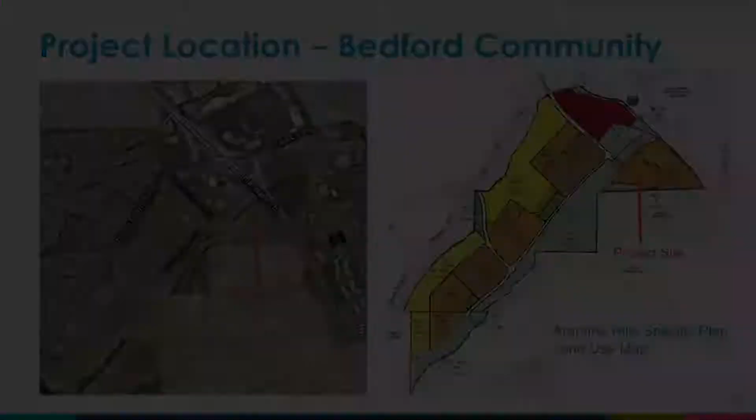The applicant of the request tonight is Pacific Ventures. They are the successor to the New Home Company, which was the original master builder of the community. Pacific Ventures is now the master builder, responsible for constructing all the backbone infrastructure as well as obtaining all the land use entitlements for each residential phase within the community. Pacific Ventures is now ready to develop the next phase within the community, and that is the proposal being presented to you tonight.

This project requires the approval of 2 land use entitlements: a tentative tract map and a precise plan. The tentative tract map is a request to subdivide the project site into 13 lots, intended to accommodate the 118 homes. The map also proposes to create 19 lots, which will contain all the private streets proposed within the development, including the open space and the private parks.

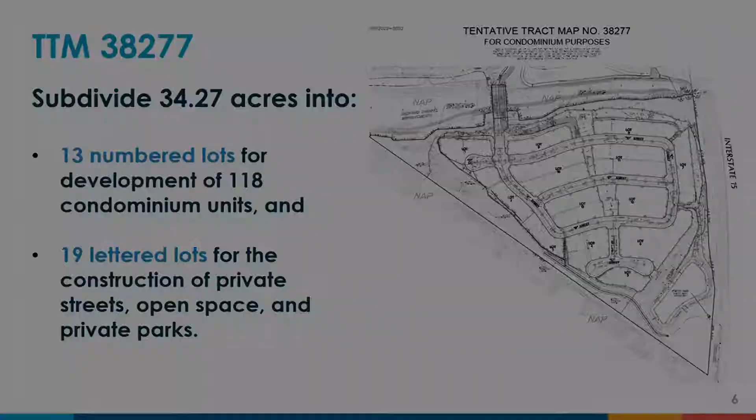The precise plan includes several details, including the site plan of the development, the product type details, the landscaping, and the fence and wall details of the proposal. In the next several slides, I will be briefly going through each element of this proposal.

The site plan is designed to accommodate the 118 detached homes, which will all be separated by fencing. The streets within the development are all proposed as private streets, but will allow for on-street parking. Access to this development will be by a bridge over the Bedford Wash, which the developer is currently constructing. The entire development will be surrounded by open space, including slopes, trails, and amenities, and there will be 2 centrally located parks within the center of the development.

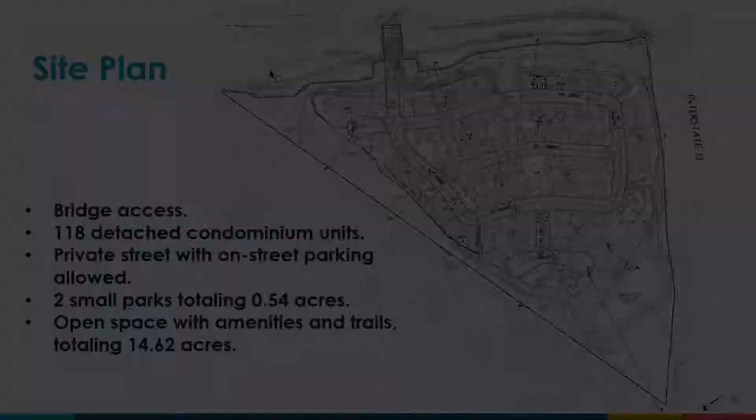There are 6 different floor plans being proposed, ranging from approximately 1,500 square feet to 2,700 square feet. Each unit has its own 2-car garage with a driveway and access to the private street. There is a mixture of 1- and 2-story homes, and 5 different architectural styles are being proposed. The floor plans and architectural design comply with the design guidelines imposed by the Arantine Hills Specific Plan.

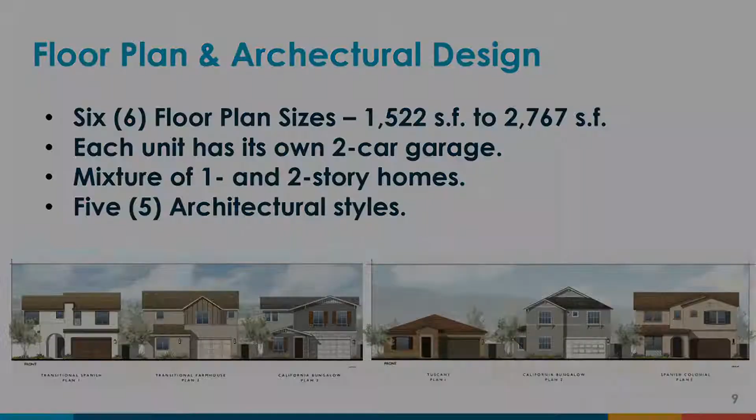The development will be fully landscaped per the landscape requirements of the specific plan. This includes all the front yards of the units, all the side yards outside of the perimeter walls, the slopes, the open space, and the parks.

Amenities include 2 centrally located parks, identified as the linear park on the plans in your staff report. There is also an additional park located along the north perimeter of the development, along the bluff of the wash, identified as the bluff. This area contains picnic tables, fire pits, trails, seated areas, and gardens. Private trails are proposed throughout the site, running along the bluff, along the wash, and along the freeway down to the south end of the site, and through the 2 linear parks.

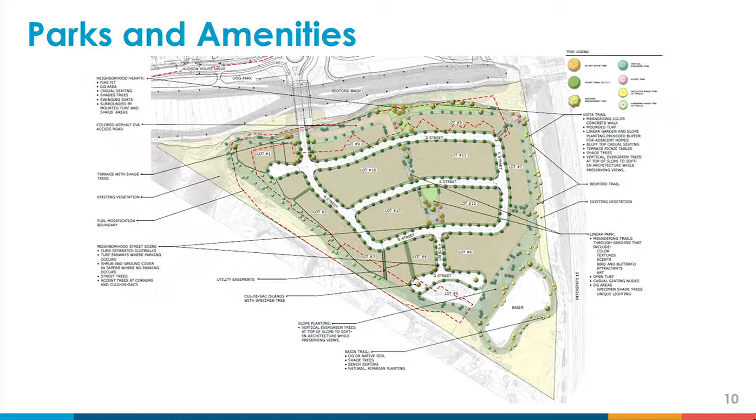The Planning and Development Department recommends that the Planning and Housing Commission approve the 2 applications tonight. That concludes my presentation. If there are any questions, I am available. The applicant is also available for questions as well. Thank you.

Thank you, Ms. Yang. Before we open public hearing, let's move to the commissioners with questions for staff, and we'll start with the tentative tract map item first, if we would. I'm sorry, Ms. Alexander, I don't have any comments for staff. Thank you. Okay, any other staff questions on the TTM?

Mr. Woody? Yeah, I have a question. So this item is labeled TTM application to divide into 13 lots for the development of 118 residential condominium units and lots for private streets, open space, and park. So the thing I'm not quite getting, though, if we're subdividing it for condominiums, but these don't really look like condominiums. Can you explain that?

Thank you, and they also put it up above. So if you could see between the three housing areas, you have lots left and right of the park in the middle, so lots C and D. Correct, C and D. So you have B up above at a certain width, you have C in the middle with a very narrow half of the width, and then you have D, which is wide again.

So it just stood out to me that C should be as wide as the other two. You have housing lots 95 and 79, I believe, and I understand why it's little, because you wanted to put two more housing condos in there. But it seems out of sorts that it should be just as wide as the other two park areas above and south of it. You have 118 condos, and it'd be great to maximize park space versus a parklet walkway.

Do you want me to respond? Okay, I absolutely hear what you're saying. I would respectfully maybe disagree a little bit that I think it adds some interest to the way the community is laid out, but I would also point out that the specific plan allows 147 homes on the site. We're proposing 118, so I think our parks are exceeding what was originally planned. We've got 0.54 acres, originally it was 0.3 acres.

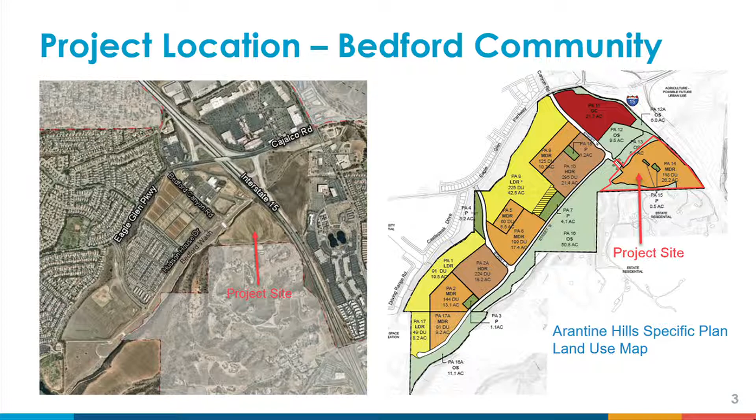Yeah, that's great, that'll work. So when you're talking about Phase 1 and Phase 2, which you said were sold recently, all the builders had sold all of Phase 1. So that's where our current main rec facility is, sort of in the central location of the community, and all of the homes are sold to home buyers, so it's fully occupied. Phase 2, towards the Bedford Marketplace, homes have been sold but not in all neighborhoods, and none have closed yet. We do have different guest builders building in 6 different neighborhoods in Phase 2.

So on the diagram, the map there, which parcels would be Phase 1? Can I direct the Planning Commission to Exhibit 14 on the precise plan staff report? If you look at that exhibit, it is labeled. Exhibit 14 is the Bedford Trails and Public Access exhibit. I did not include a slide in the presentation, but it is in your staff report. Yeah, I see Exhibit 14. Okay.

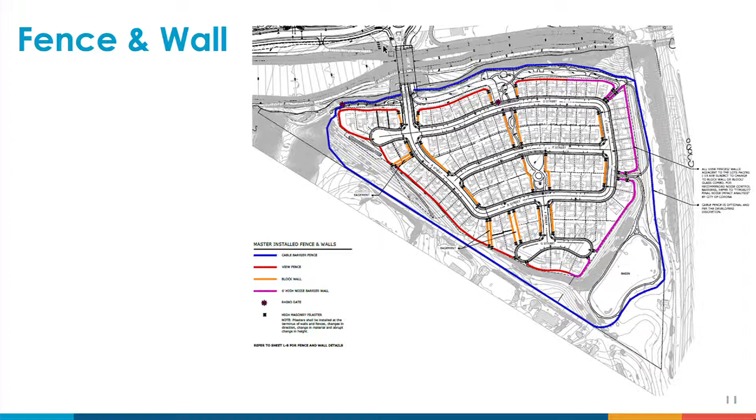So on that diagram where it has the blue around the whole thing, it says cable barrier fence. You're saying that may not be there because you'll have landscaping instead? If you read the small print, it says at developer's option. So we're still debating if we're going to put that cable fence. It's a 4-cable fence, and we're debating if it's really necessary given all the walls we're going to be building otherwise. There'll be a fence around the detention basin to keep people out of that, and a series of other walls. We're trying to balance this so it doesn't, effectively look like a prison's an overstatement, but we're trying to make it aesthetically pleasing as well. But again, we want to make sure we're sensitive to our neighbors.

Well, I'll fess up, Phase 1, I was one of the big critics, not only for the density but the look. So thank you for coming in and putting together condos that look like single-family homes. I really love that look. It's very homey, and it's less of Phase 1. So I like that look. I can appreciate the neighbors' concern. I think the drop between the county area and the rough grading that came down that many feet is somewhat of a buffer for that.